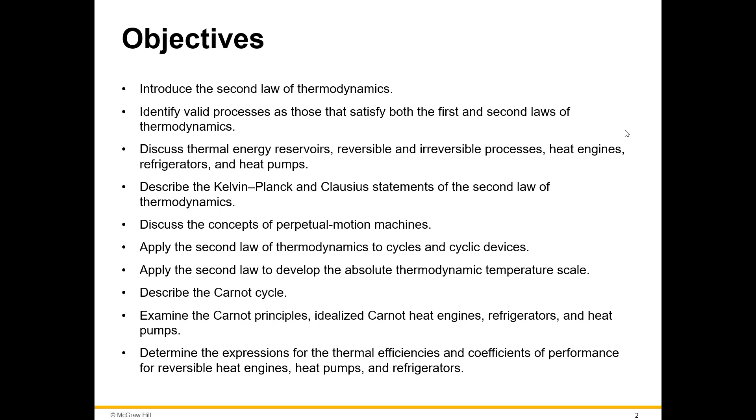Here are the objectives. We're not going to run through each one, but of course we're going to go over what the second law of thermodynamics is and just some things that accompany that.

For the second law of thermodynamics, we talked about it in the first lecture, where the biggest contribution that the second law did was the arrow of time, or some people say the arrow of time. And we often actually use statements to describe the second law of thermodynamics because, in my opinion, it's not as straightforward as the 0th law.

Or the first law. So remember the 0th law, that's basically where we got temperature measuring, right? No matter where you are on Earth, water is going to freeze at 32 degrees. And when you have that third item, you can measure and verify that. And the easiest way to think of that third entity or that third body in the 0th law is a thermometer.

And then the first law, we just spent 5 chapters learning about it. That's energy can never be created nor destroyed. It can only be transferred or changed from one state to another, whether it be potential energy, it can go to kinetic energy, things like that. So now we have the second law.

And so this is that arrow of time. And you've heard me mention the apple example, right? If you have apples, it's going to rot, right? You're never going to witness it go from rotting to unrotting, right? So just like here, a cup of hot coffee does not get hotter in a cooler room, right?

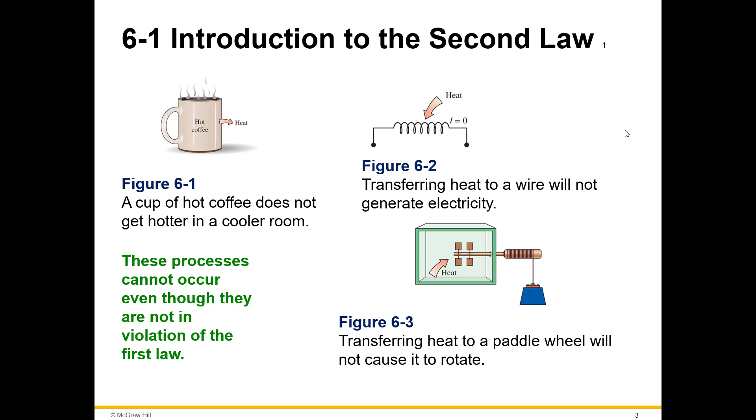They're not violating the first law at all. Energy can never be created nor destroyed. It can only be transferred. Well, we are definitely transferring heat to a paddle wheel, but that's not going to cause it to rotate, right? Transferring heat to a wire will not generate electricity, okay?

This is that arrow, okay? One way. Processes occur in a certain direction and not in the reverse direction. So here are these processes. So within these processes, you have a process that's going through, and you see you have first law, and then second law. And a process must satisfy both the first and second laws of thermodynamics to proceed. And it has to go in one way, right?

So you have to have an energy transfer, right? And then it needs to satisfy that the process occurs in a certain direction and not in the reverse direction.

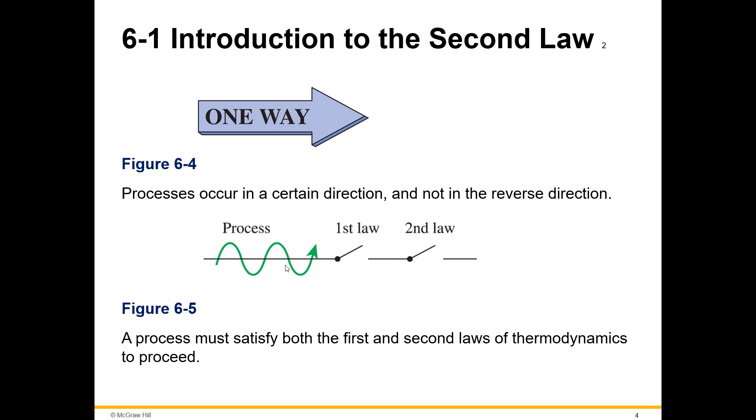So here's the major uses of the second law. A second law may be useful to identify the direction of a process, right? We've talked about that quite a lot. The second law asserts that energy has quality. We talked about that just a little bit, and we talked about it under the curve, right, in the two-phase, what that quality is.

So the second law asserts that energy has quality as well as quantity. So we've measured the amount of energy, but now we're going to talk about the quality of it. The first law is concerned with the quantity of energy and the transformations of energy from one form to another, with no regard to its quality. The second law provides the necessary means to determine the quality, as well as the degree of degradation of the energy during a process. So that's when we can start talking about how that energy is degrading, right, through a process.

The second law of thermodynamics is also used in determining the theoretical limits for the performance of commonly used engineering systems, such as heat engines, refrigerators, as well as predicting the degree of completion of chemical reaction. Right? So if we're talking about calculating the amount of energy, we can definitely do that. We can calculate with no limit. We can calculate to infinity, right? You can calculate as high as you want, or you can calculate chemical reactions in an endless amount.

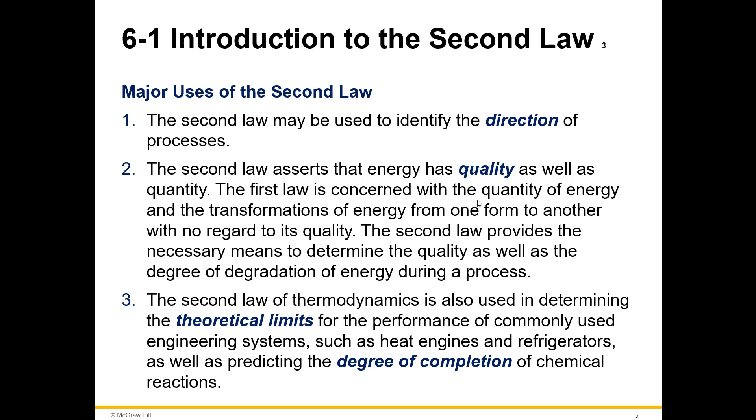A hypothetical body with a relatively large thermal energy capacity, mass times specific heat, that can supply or absorb finite amounts of heat without undergoing any change in temperature is called a thermal energy reservoir, or just a reservoir. So that was a lot in practice, in the real world, where it feels easier to understand.

Large bodies of water, oceans, lakes, rivers, as well as the atmospheric air, can be modeled accurately as thermal energy reservoirs because of their large thermal energy storage capabilities, or thermal masses. So we talked about that a little bit. If you go and take the temperature of a body of water, and you have someone boiling water 10 feet from you or 20 feet from you in the ocean, that ocean is going to be able to absorb that and likely not even change what you're able to measure in that large body of water. Bodies with relatively large thermal masses can be modeled as thermal energy reservoirs because they can hold, accept, absorb that thermal energy.

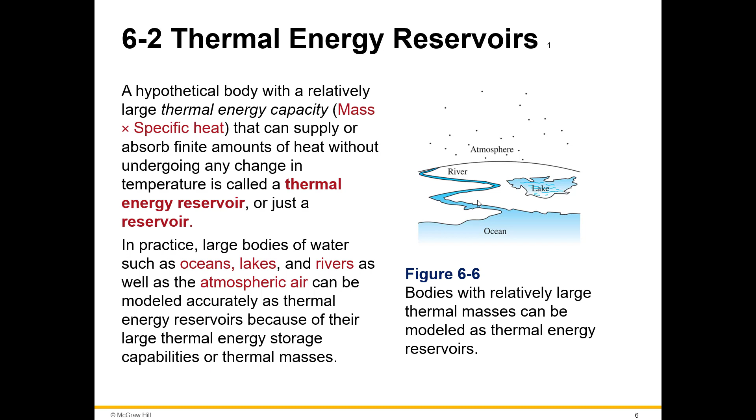A reservoir that supplies energy in the form of heat is called a source. And one that absorbs energy in the form of heat is called a sink. Thermal energy reservoirs are often referred to as heat reservoirs since they supply or absorb energy in the form of heat. So you see that thermal energy source pushing that heat out, and then you see the thermal energy sink receiving that heat in. A source supplies energy in the form of heat, and a sink absorbs it. So you can think of it, if it's easy for you, like a faucet. Thermal energy source is going to provide it, that's the faucet, and then the sink is going to receive that heated water.

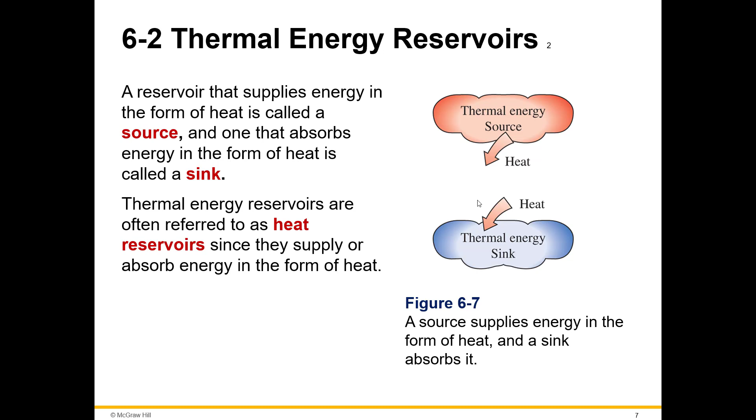Heat engines: a device that converts heat to work. We just talked about that in the first slide here when we said, hey, you can give something all day heat, that doesn't mean that it is going to spin the turbine, or spin the shaft. Well, here you go. You've got a heat engine, a device that converts heat to work.

Because you can give energy. Energy can be transferred through two different means, heat and work. Heat transfer and work, right? It's the two ways we transfer energy. But sometimes we have a lot of heat, like the sun. Sometimes we have a lot of heat, but you know what I need? I need my car to go. I need my tires to spin. I need work being done. I don't need any more heat. I need work. But all of our energy originates from the sun, originates from heat.

So you can look at all of our work being done in non-natural forms. You could make the argument that a waterfall can produce work, things like that. But when you're talking about heat from a sun, from a fire, things like that, you're basically converting it to work.

They receive heat from a high temperature source: solar energy, oil furnace, nuclear reactor. They convert part of this heat to work, usually in the form of a rotating shaft. That's by and large what we use because it's simple, it's long lasting, and it's one of the more efficient ones that we have. They reject the remaining waste heat to a low temperature sink, the atmosphere, rivers, things like that, that can absorb it.

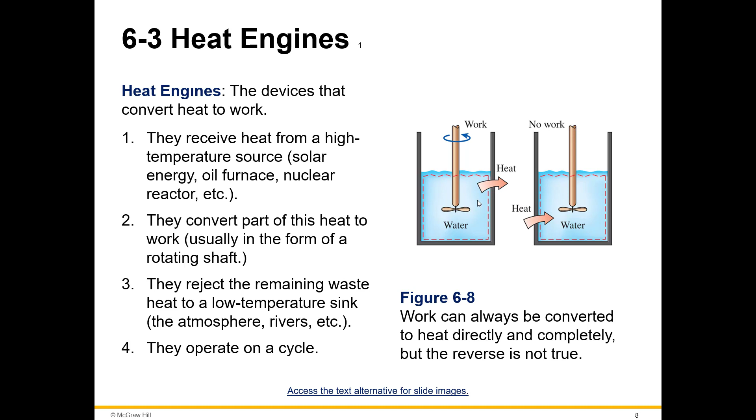So you see work in the water going to heat, and then you see heat going into the water. That doesn't mean you're going to get work, right? They're not interchangeable. They're not exactly the same in reverse, okay?

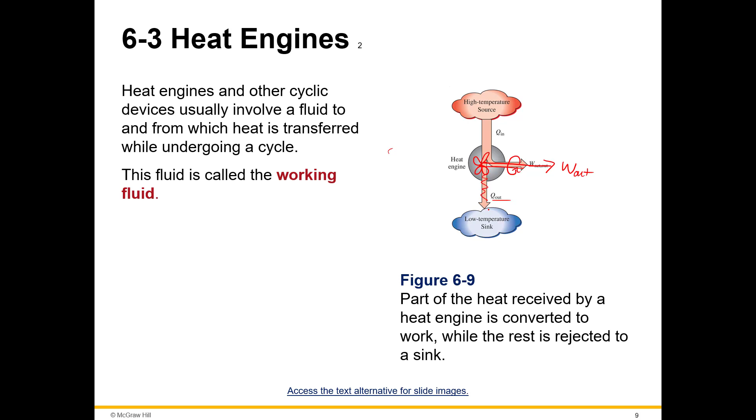And remember, our atmosphere can also serve as a low temperature sink. This is where you get a lot of pollution from before we learned to clean. I mean, it's still happening, but before, by and large, industry knew to clean what you were expelling into these low temperature sinks, into the oceans, things like that.

Q in is the amount of heat supplied to steam in a boiler from a high temperature source, like a furnace, so it's the heat transfer in. And then Q out is the heat transfer out, the amount of heat rejected from steam in a condenser to a low temperature sink, the atmosphere or a river, things like that.

W out is work out, the amount of work delivered by steam as it expands in the turbine, because we need an actual device to convert that heat to work. Work in is the amount of work required to compress water to boiler pressure. So net work is going to equal work out minus work in, in kilojoules. And net work out also equals Q in minus Q out, in kilojoules. It's just the difference between those.

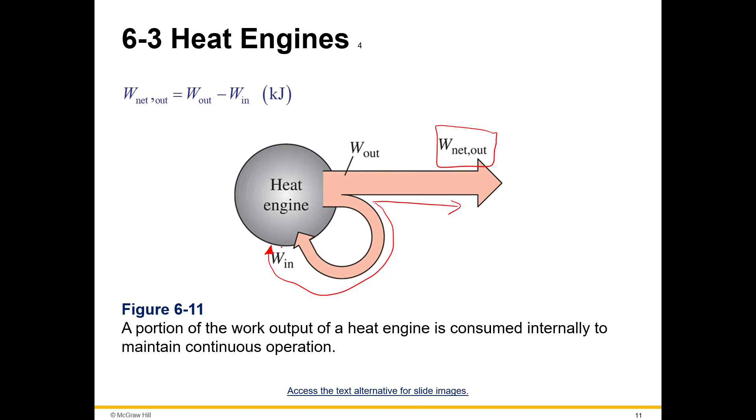So if you're going to expel out some of this work, we're of course going to want to use it. But wouldn't it be great if some of it just went right back around here, and you didn't need another device to come in, you didn't need another turbine here? Because how are we getting this work in? It's got to come from somewhere. Well, maybe we can just take some of the work over here and put it right into this side.

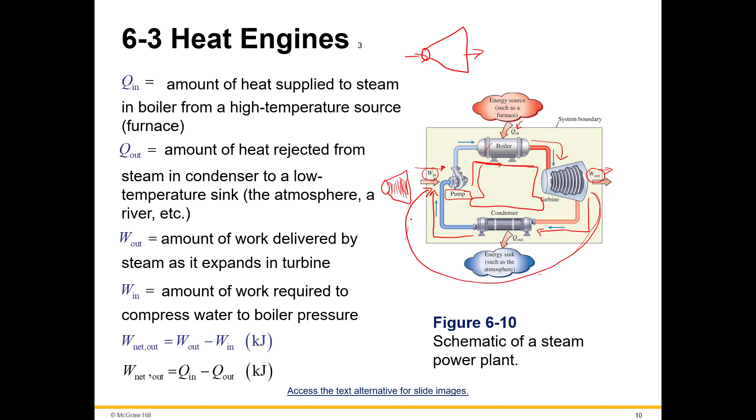That would be great. Thermal efficiency, when we're talking about transferring heat—we want to make it as efficient as possible, because remember, we went over refrigerators and air conditioners. We learned that when we say something's efficient on the grand scheme of 100% efficiency, it's definitely not efficient.

So we have thermal efficiency: the net work output over the total heat input. It's just that ratio. Remember, eta is for efficiency. And TH—that's not efficiency, that's thermal. Remember, I always have at least one student... it's like 7th, 8th, nth. So you have net work out over heat transfer in, and net work out is just the difference between heat transfer in and out, because those, remember, are equal. We learned that in Thermo 1. And then thermal efficiency is 1 less the ratio of Q out and Q in.

The fraction of heat input that is converted to net work output is a measure of the performance of a heat engine and is called thermal efficiency. Of course we're just going to measure the performance—how efficient is it? Some heat engines perform better than others, which means they convert more of the heat they receive into work.

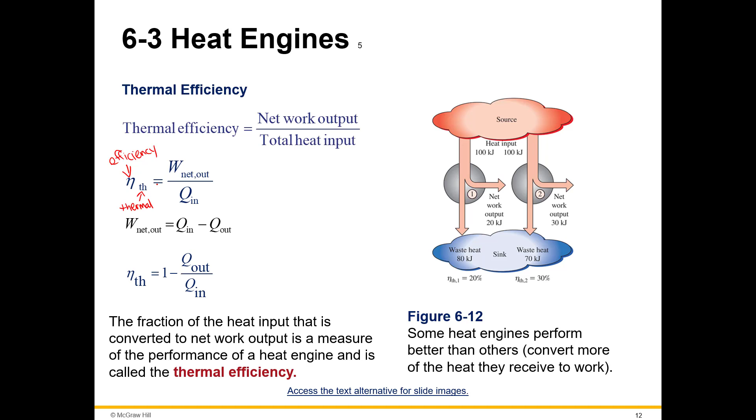QH is the magnitude of heat transfer between a cyclic device and a high temperature medium, so that's TH, high temperature. QH is high heat transfer. QL is the magnitude of heat transfer between a cyclic device and a low temperature medium, TL. So you see here, you've got this high temperature reservoir. If you've got high temperature, you're going to have high heat transfer. And then you're going to have low heat transfer at a low temperature, TL.

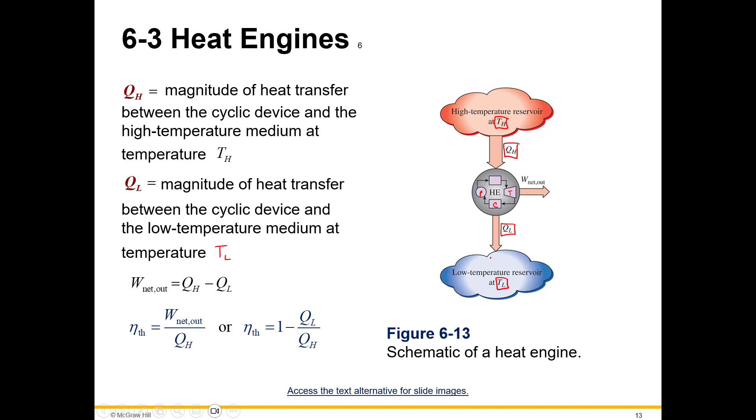And then through here you have a heat engine, and you have this little cycle. You see the pump right here. You've got a turbine here, condenser maybe here, and then you have some net work out, and then you've got the reservoir. And you've got the definitions and equations that we've gone through, and then here's those formulas again, just kind of showing you.

Remember, heat is never created nor destroyed, and it needs to pass the first and second law to be a process. So we have heat transfer coming in at 100, work being produced at 55, so we should have QL of 45, the difference between those two. And just thinking, what about this pump over here? Well, maybe some of this net work out is coming over here, or maybe we have 10 coming around here, and that's added into here, and we're going to have some of it expelled over here.

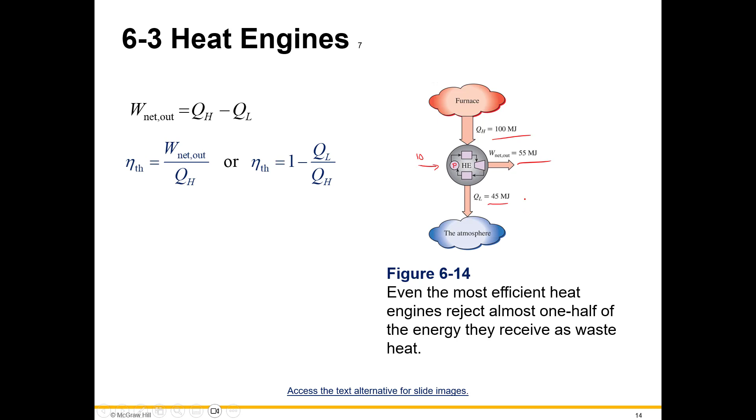In this steam power plant, the condenser is the device where large quantities of waste heat are rejected to rivers, lakes, or the atmosphere. Can we not just take the condenser out of the plant and save all that wasted energy? The answer is, unfortunately, a firm no.

For a simple reason: without a heat rejection process in the condenser, the cycle cannot be completed. Every heat engine must waste some energy by transferring it to a low temperature reservoir in order to complete the cycle, even under idealized conditions. So a couple things I want to talk about here. Idealized means perfect conditions, and we know that perfect is never, ever obtainable.

An example of an idealized condition is an isolated system, not just a closed system, but an isolated system. Or we were operating under idealized conditions all in Thermo 1 because we did not take into account friction, or we didn't really take it into account. We're definitely having some loss there. So under idealized conditions, it's perfect conditions, everything operating at 100% efficiency.

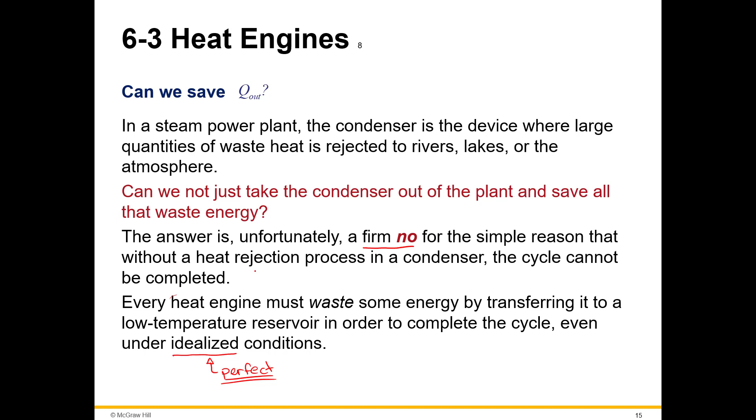So it's a firm no, because I promise you, if there was a way to avoid any heat rejection, we would. We absolutely would, because it's more efficient and it costs less money. So we want to capture everything, but it's a firm no. We definitely cannot. A heat engine cycle cannot be completed without rejecting some heat.

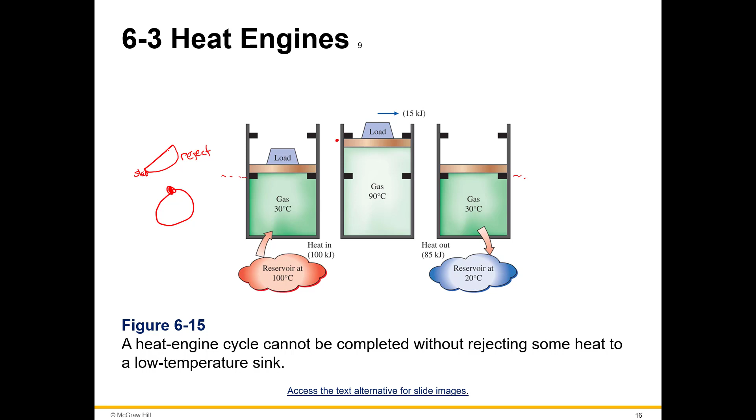The cycle has to start and end at the same place. We can't start and end and then somehow get back to the start. We need a cycle, we need to come back, we need to reject heat. We need to come back to the starting point for a cycle.

Net power production of a heat engine. So here we have some formulas—it's just very easy, 80 minus just the difference, right? And then here's the schematic that we've kind of walked over.

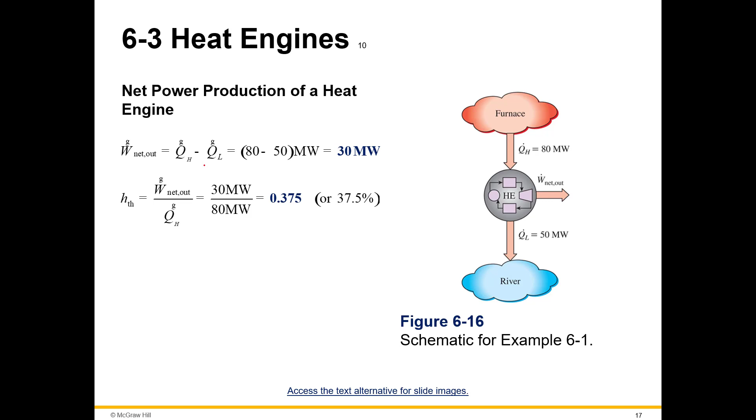Now, I mentioned it before: we actually use a few statements to better describe the second law of thermodynamics.

So let's look at the Kelvin-Planck statement: it is impossible for any device that operates on a cycle to receive heat from a single reservoir and produce a net amount of work. This statement is saying that is possible—heat engines are possible.

No heat engine can have a thermal efficiency of 100%. No heat engine can be 100% efficient. This is saying that we have to expel some. We can't, within a heat engine, take 100% of that thermal energy and have the same amount for net work out. We can't do it. Or, as for a power plant operating, the working fluid must exchange heat with the environment as well as the furnace—we must have some coming out.

The impossibility of having a 100% efficient heat engine is not due to friction or other dissipative effects. It is a limitation that applies to both idealized and actual heat engines. So what it's saying is, on top of the fact that we can't avoid friction, and we're going to have some dissipative effects, on top of idealized regions, we can't have it from an actual heat engine—it's not going to function.

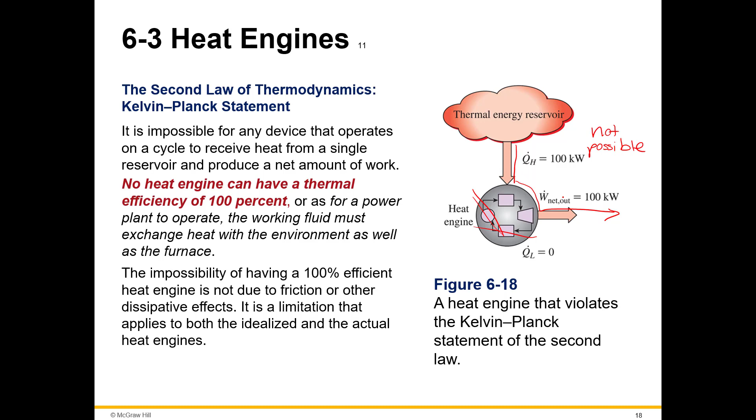The transfer of heat from a low temperature medium to a high temperature one requires special devices called refrigerators. Refrigerators, like heat engines, are cyclic devices—they just operate in reverse. The working fluid used in a refrigeration cycle is called the refrigerant. The most frequently used refrigeration cycle is the vapor compression refrigeration cycle.

We talked about that a little bit—compressing it to get a phase change and a drop in temperature. In a household refrigerator, the freezer compartment is where heat is absorbed by the refrigerant. Remember I said, don't think of it as blasting cold air in—think of it as heat absorbed, because the second law says heat flows from hot to cold, not the other way around. The other way around, cold to hot, violates the second law. We have an arrow of direction right here: hot to cold.

Heat is absorbed by the refrigerant in what serves as the evaporator, and the coils—usually behind the refrigerator—where the heat is dissipated to the kitchen air serve as the condenser.

And so you'll see here, you follow the flow of energy: we have Q-L-N, a low heat transfer—not cool air, but a low heat transfer—going into that evaporator. We come around, and we have some net work into this compressor, because we need to make this non-natural phenomenon work; we need to put some work in there. Then that's going to come up, and it's going to be hot. We absorb that heat and expel it out the back of the refrigerator. Then we come around to an expansion valve.

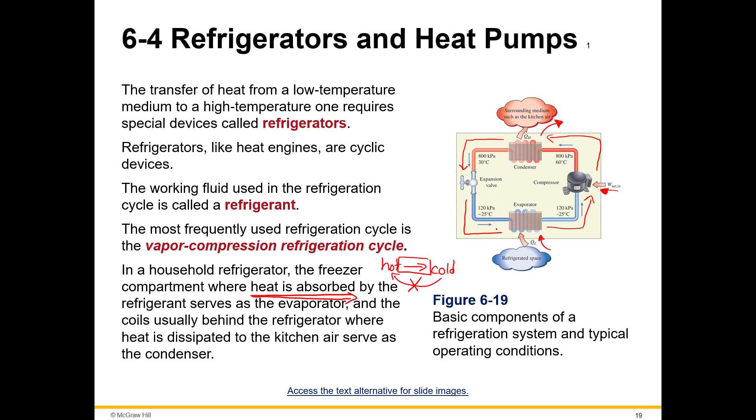We're going to cause a drop in temperature. We're going to come back around into the refrigeration space and see the evaporator.

Coefficient of performance. The efficiency of a refrigerator is expressed in terms of COP, coefficient of performance. That's where we find how efficient the refrigerator is. So you see we have those formulas here, and you can see the same heat engine schematic, just in reverse, because this is the refrigeration one.

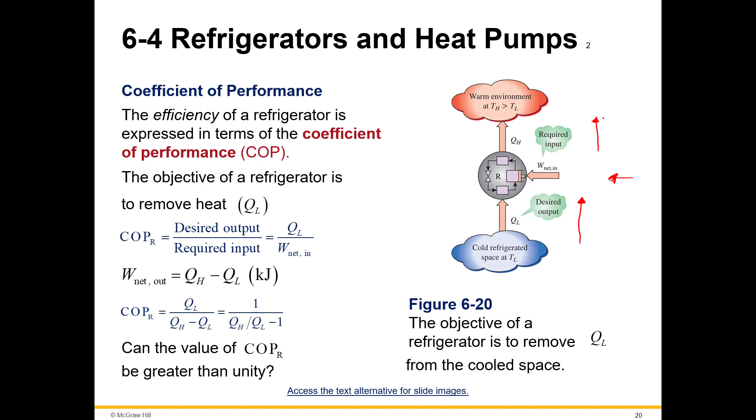So you have QL, a low heat transfer. I'm not going to say cold, I'm going to say low heat transfer, because remember, we do not want to violate the first law. We have some net work coming in, and then we have QL being expelled, QH being expelled. Okay, we have heat pumps, which have coefficient of performance formulas here.

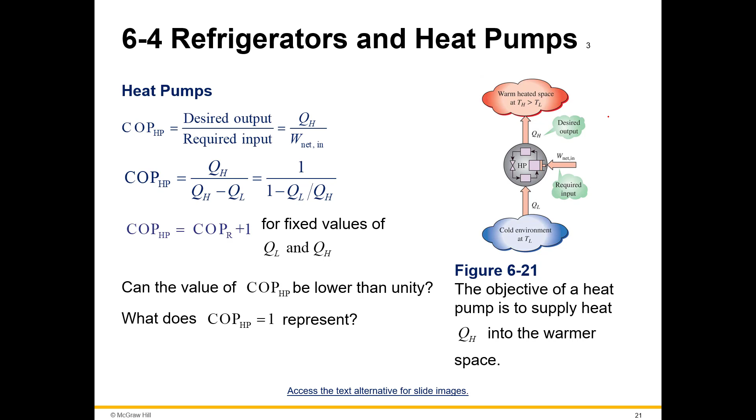We kind of already talked about those. All right, and then refrigeration and heat pumps. So this is cold outdoor air, all outdoors, and then warm indoors.

And so we have right here, we have some work coming in, and QH coming in. We are heating this house, right? So we have right here, a low temperature coming in. We're going to go into this. Around here, we have some net work coming in, and we're going to expel that hot discharge into our indoors. We're going to heat this house.

Isn't that amazing? Your air conditioner works theoretically, right? I'm not going to say exactly, because you don't have a refrigerator hooked up outside, right? But theoretically, it's basically the same as your heater. We're just using the expelling to heat indoors. So, of course, there's multiple different types of heaters, but just from a schematic perspective.

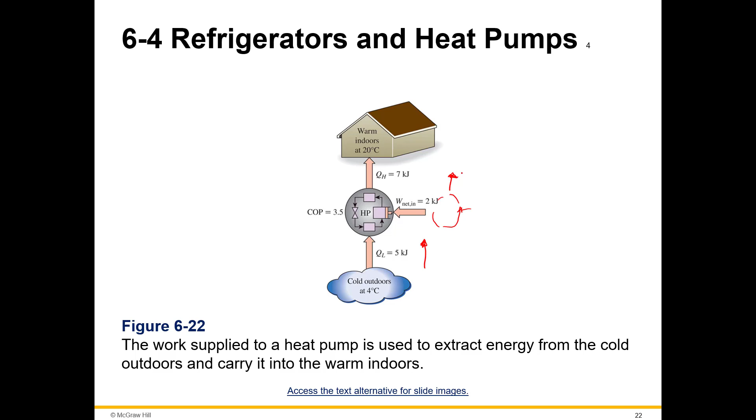The work supplied to a heat pump is used to extract energy from the cold outdoors and carry it into the warm indoors. This describes the performance of refrigerators, air conditioners, and heat pumps.

Most heat pumps in operation have a seasonally average coefficient of 2 to 3. Most existing heat pumps use the cold air outside as a heat source in winter. And then in cold climates, their efficiency drops considerably when temperatures are below the freezing point.

That's just because it's harder to work. It's harder to get that into the working fluid because it's colder. You need more work in to convert it, to bring it up. In such cases, geothermal ground source, which uses the ground as the heat source, can be used.

And this is because in really, really cold environments, say you were in a cave — I did a cave tour a couple months ago — it was very, very cold outside. But when you went underground, it was relatively warm. And it's because the temperature is much more stable underground.

It's much more consistent. So if it's really, really cold outside, the ground is going to be warmer. Or if it's really, really hot outside, the ground is going to be colder, because it's keeping that — I won't say completely, but much more close to equilibrium temperature than what we experience just in our natural atmosphere. Such heat pumps are more expensive to install, but they are also more efficient. It's because it's more stable. That's one reason why it's more stable, right?

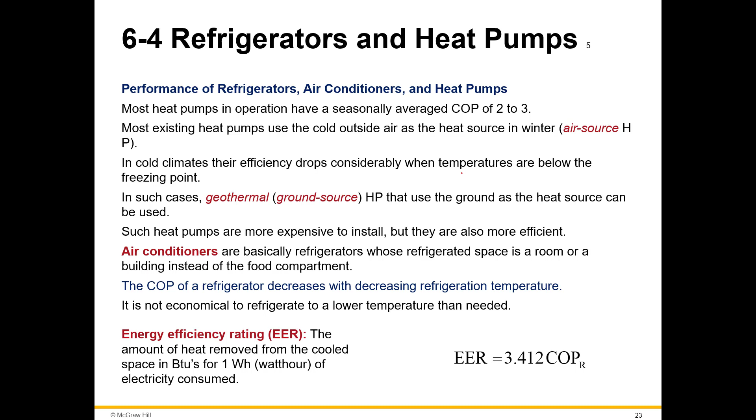Energy efficiency rating: the amount of heat removed from the cooled space in BTUs for 1 watt-hour of electricity consumed.

So let's move to the second law of thermodynamics, the Clausius statement. So we have the Kelvin-Planck statement — we can't violate that. And now let's look at the other statement. These two statements are the ones that describe the second law.

It is impossible to construct a device that operates in a cycle and produces no effect other than the transfer of heat from a lower temperature body to a higher temperature body. It states that a refrigerator cannot operate unless its compressor is driven by an external power source, such as an electrical motor. You know what that means?

That's what it means. The net effect on the surroundings involves the consumption of some energy in the form of work, in addition to the transfer of heat from a colder body to a warmer one. So I need both work to come in and do the thing that is not naturally going to happen, which means something going from a lower temperature to a higher temperature on its own.

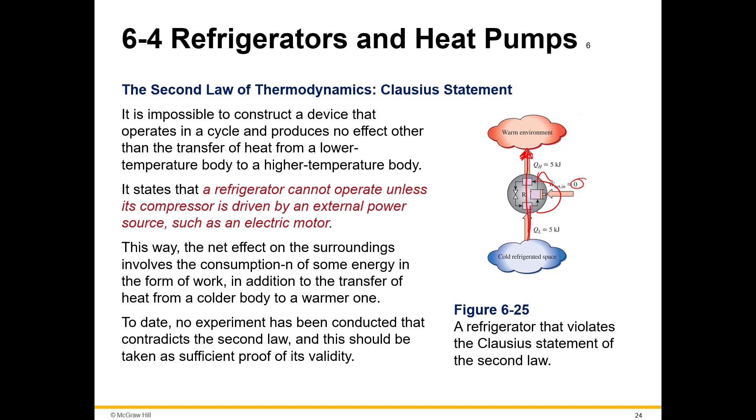This is a refrigerator that violates the Clausius statement, because this is not going to happen. I can't have no work and go all the way over here. If so, why wouldn't I just go here? I can't go from cold to warm. I need something else to come in and do it.

So here's the equivalency of the two statements. This is proof that the violation of the Kelvin-Planck statement leads to the violation of the Clausius statement. You see how they are related but not exactly the same? The Kelvin-Planck and Clausius statements are equivalent in their consequences, and either can be used as the expression of the second law of thermodynamics.

So this is how we express the second law of thermodynamics: the Kelvin-Planck and the Clausius statement. Any device that violates the Kelvin-Planck statement also violates the Clausius statement, and vice versa. So if you violate one, you violate both. And here they are.

So if you have QL coming into a refrigerator, and you have this heat engine, you have QH plus QL from the high temperature reservoir going in, QH into the heat engine, and now you've entered the cycle. You need that work coming in. You need this work, and it's both missing if you violate it. So if you violate one, you violate both.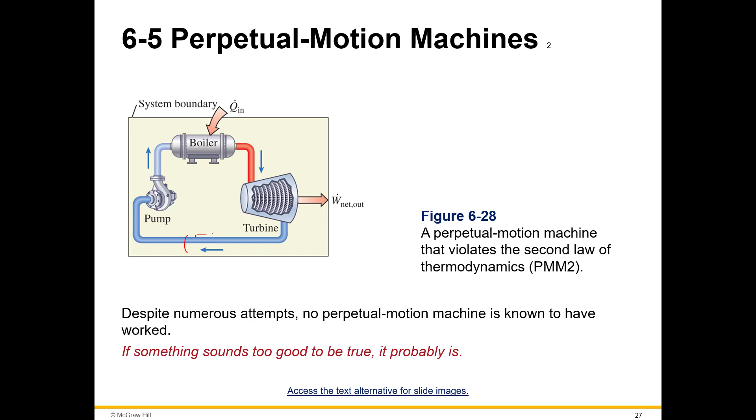And this one violates the second law, PMM2. You see here it's missing that condenser. There it is — we need something to expel out as well. So we have that Q out.

Reversible processes: a process that can be reversed without leaving any trace on its surroundings. An irreversible process is one that is not reversible. Think of it as a rubber band — if you stretch it and it goes to this stretched state, and then it comes back, it's just back to that original rubber band. This is reversible.

Irreversible: take this plank, this toothpick, and then you bend it. This toothpick is bent like that. And then you let go of it, and it's going to stay just like this. This is state 1, state 2, and then state 3. This is a reversible process. This, state 1, state 2, and then state 3, is irreversible. All the processes occurring in nature are irreversible.

Why are we interested in reversible processes? Because they are easy to analyze, and they serve as idealized models, theoretical limits, to which actual processes can be compared. This is really important to know.

So when we talk about reversible processes, think of it from a common sense standpoint. Even though we have this rubber band, and we've stretched it and it came back, is it 100% the exact same as state 1? Is state 1 and state 3 the exact same in the real world? Of course not. It's going to have some little fissure, some loss of elasticity. Maybe we don't even have the tool to calculate the additional length that we got from stretching it. We know in our brain that it's not 100% completely reversible. But we use these types of scenarios to analyze them so that we can get limits.

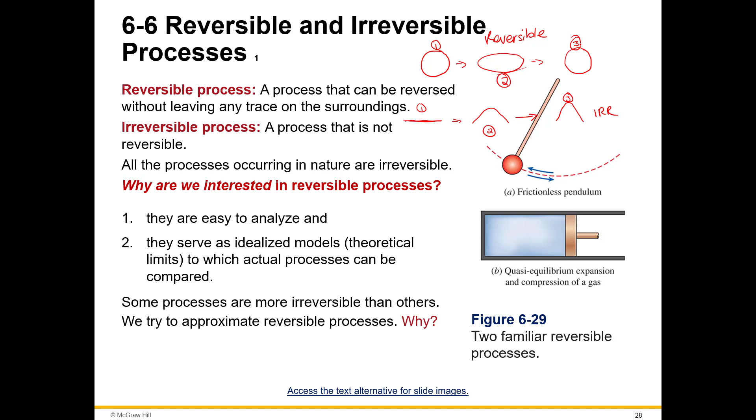Some processes are more irreversible than others. We try to approximate reversible processes. Why? So that we can compare them, so that we can see how efficient our item is, or our process, whatever we're doing. Reversible processes deliver the most and consume the least amount of work. Why? Because it's under idealized conditions. We're going to be extracting the most, and we're going to be using the least amount of work.

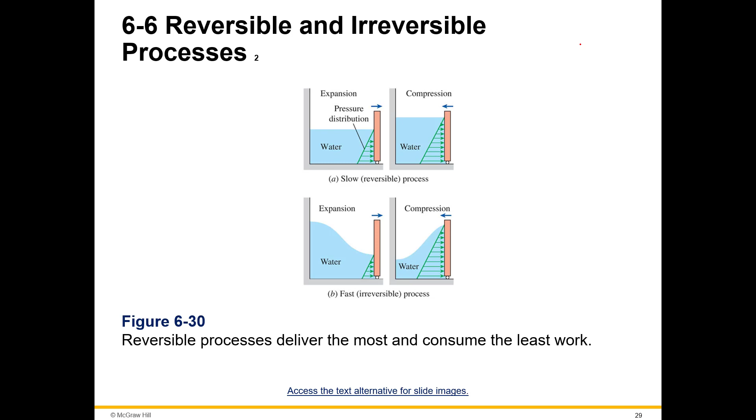Irreversibilities are the factors that cause a process to be irreversible. They include friction, unrestrained expansion, mixing of two fluids, heat transfer across a finite temperature difference, electric resistance, inelastic deformation of solids, chemical reactions, and more. The presence of any of these effects renders a process irreversible.

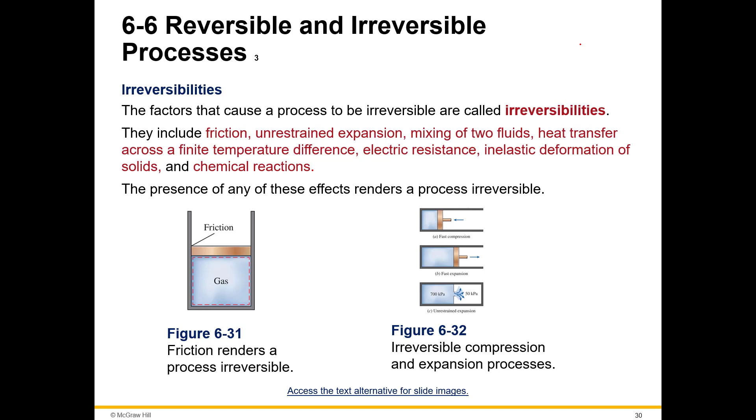So we know that actually everything is irreversible. But we do use things and assume they are reversible so that we can use them as measuring points, even as goals you can think of it, trying to achieve reversible levels. You know that you never will, but that's the best that you could ever get. So that's what you strive for.

Heat transfer through a temperature difference is called irreversible, and the reverse process is impossible. So heat transfer through a temperature difference is irreversible. You can't undo it, and also you can't reverse it. We go from hot to cold, and so we can't go backwards and we can't undo it.

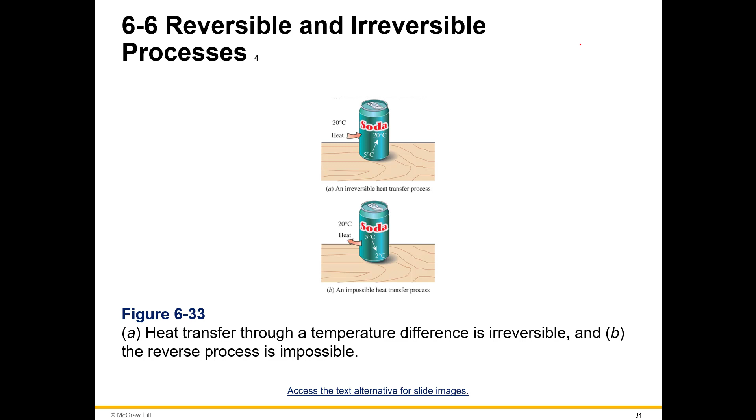Internally and externally reversible processes: an internally reversible process is one where no irreversibilities occur within the boundaries of the system during a process. Externally reversible is if no irreversibilities occur outside the system boundaries. A totally reversible process involves no irreversibilities within the system or its surroundings.

A totally reversible process involves no heat transfer through a finite temperature difference, no non-quasi-equilibrium changes, and no friction or other dissipative effects, which we know exist. So we know that this is not physically possible, but we will calculate on it.

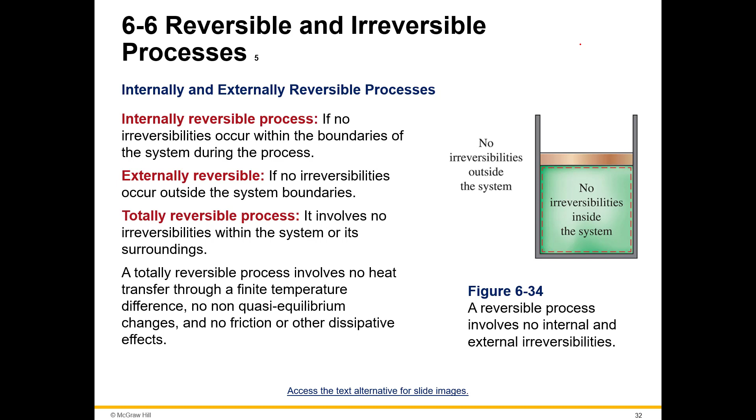So here we have reversible isothermal expansion. We have QH going in, so we're going to have some expansion. And then we have reversible adiabatic expansion, so that's going to be here.

Okay, and reversible isothermal compression. So we're compressing. And then we have reversible adiabatic compression. Just showing you on a schematic.

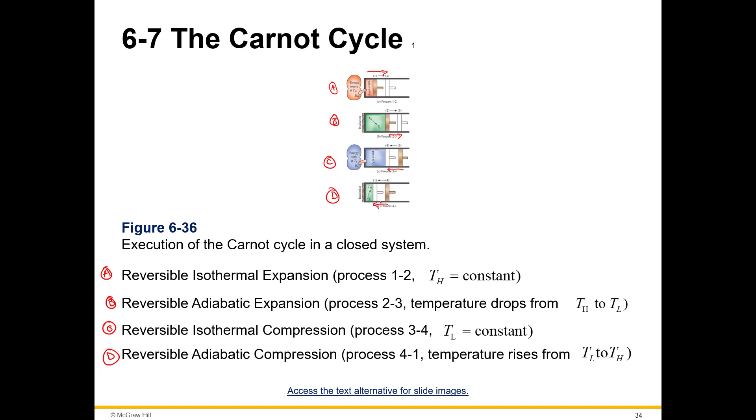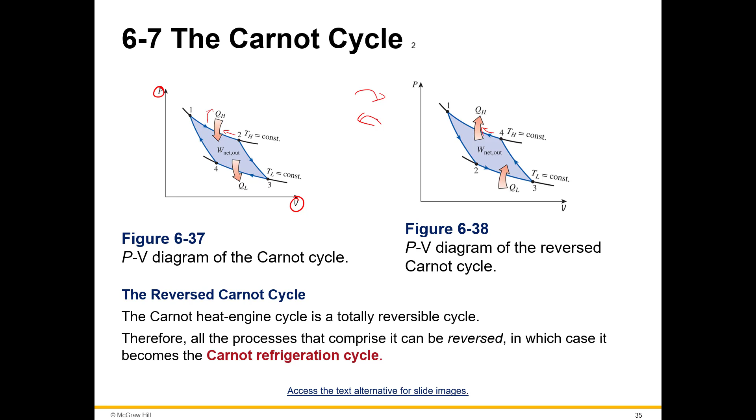The Carnot heat engine cycle is totally reversible. It is a totally reversible cycle. Therefore, all the processes that comprise it can be reversed, in which case it becomes the Carnot refrigeration cycle.

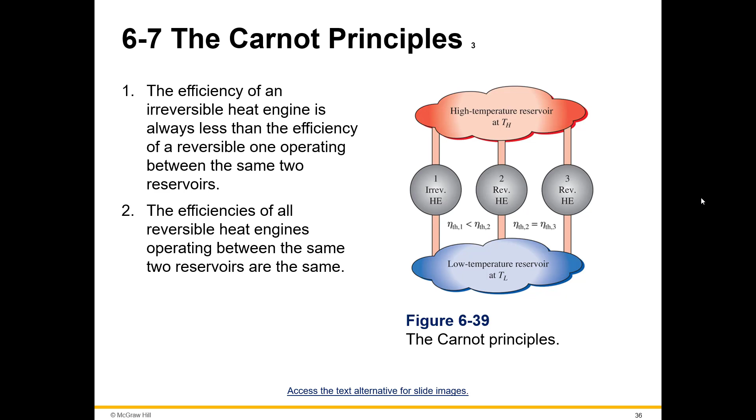The efficiency of an irreversible heat engine is always less than the efficiency of a reversible one operating between the two reservoirs. That makes sense, because if it's reversible, then we know it is operating under idealized conditions. So of course, the efficiency of that is going to be higher, because theoretically it should be perfect efficiency. So the efficiency of an irreversible heat engine is always going to be less. The efficiency of all reversible heat engines operating between the same two reservoirs, so operating under the same conditions, are the same, because if you have the same conditions, and within those two conditions they are perfect or reversible or idealized, then the efficiency is going to be perfect and thus the same.

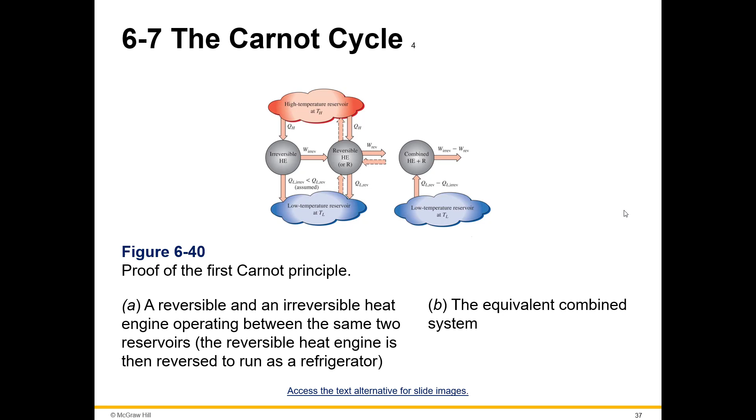Proof of the first Carnot principle. So here we have A, and remember we can't violate the first or second law of thermo. A reversible and an irreversible heat engine operating between the same two reservoirs. The reversible heat engine is then reversed to run as a refrigerator. Okay, and then B, so that's able to be done, correct? And then B, the equivalent combined system. So all this is saying is that it doesn't violate the first and second law. It's just letting you know that the Carnot cycle does not violate any sort of law.

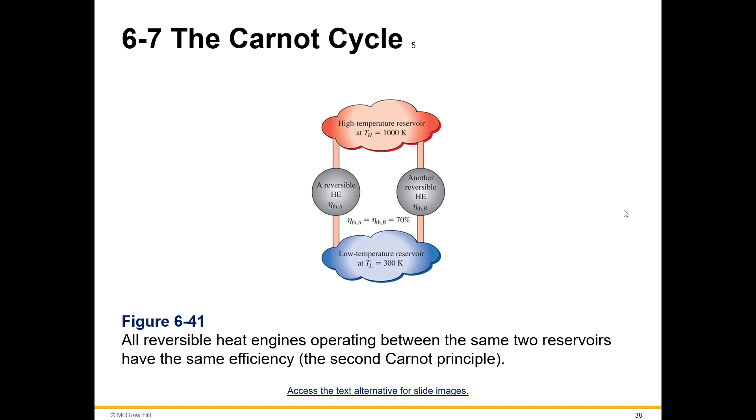All reversible heat engines operating between the same two reservoirs have the same efficiency, which is the second Carnot principle, which means that when you have the same conditions and they are reversible, then they're going to have the same efficiency.

A temperature scale that is independent of the properties of the substances used to measure temperature is called a thermodynamic temperature scale. Such a temperature scale offers great conveniences in thermodynamic calculations, because as you can see and as you have seen, temperature is one of the main things we work with, especially with PVT because of the relationship.

Here's the schematic, the arrangement of the heat engines used to develop the thermodynamic temperature scale. This just kind of goes through what those are. And then you can kind of see T2 where it takes certain temperatures. So you have T1, which is the thermal energy reservoir, and T2 is about midway through, and T3 down there is the thermal energy reservoir at the bottom.

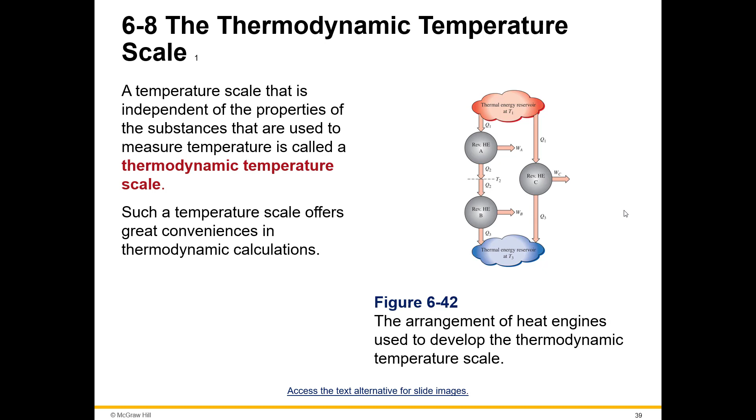This temperature scale is called the Kelvin scale, and the temperature on this scale is called absolute temperatures.

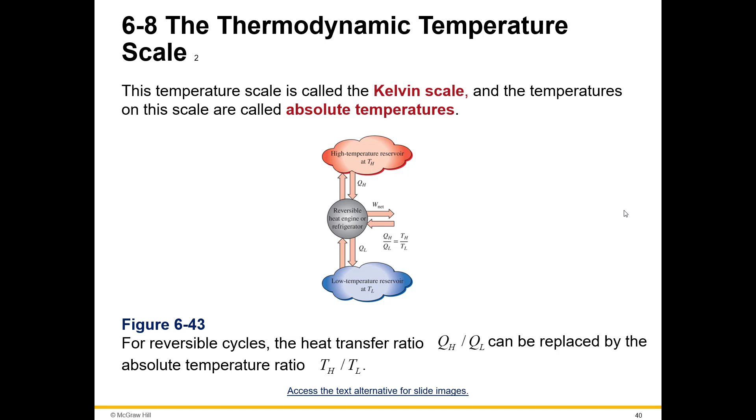And for reversible cycles, the heat transfer ratio, which is QH over QL, can be replaced by the absolute temperature ratio, TH and TL. A conceptual experimental setup to determine thermodynamic temperatures on the Kelvin scale by measuring heat transfers QH and QL. So first of all, T in Celsius equals T Kelvin minus 273.15. Of course, that's the conversion. But then this is just showing you that QH, again, with these boxes, like what is happening?

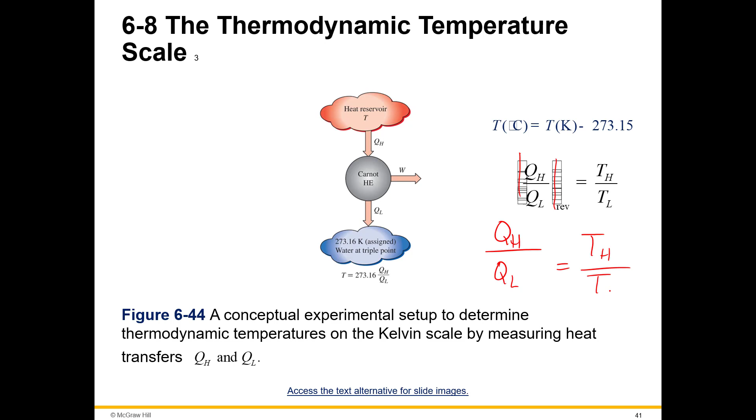QH over QL, and this is equal to TH over TL. And this is in regard to reversible heat engines.

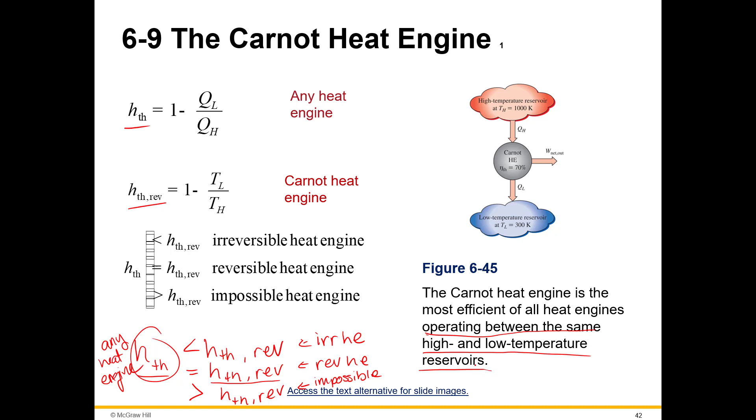So we always make that little plug in there to let you know that, hey, these are tested under the same conditions so that we understand what is able to be operated between the two.

No heat engine can have a higher efficiency than a reversible heat engine operating between the same high and low temperatures. We've talked about that, right? So you cannot have a higher efficiency than a reversible heat engine. The Carnot heat engine is the reversible heat engine. Therefore, you cannot have a higher efficiency than the Carnot heat engine.

So therefore, if your heat engine is equal to a Carnot heat engine, then you are having a reversible heat engine with the highest efficiency. If your heat engine is less than the Carnot heat engine, well then you're having a real world, an irreversible heat engine, right? One that we encounter all the time.

And if what you're calculating with your heat engine is a higher efficiency than a Carnot heat engine, well then you know that's impossible and that's not realistic, because you can't have something better than perfect. You can't have more perfect. It's either perfect or not. To say something is more perfect is not even a correct thing.

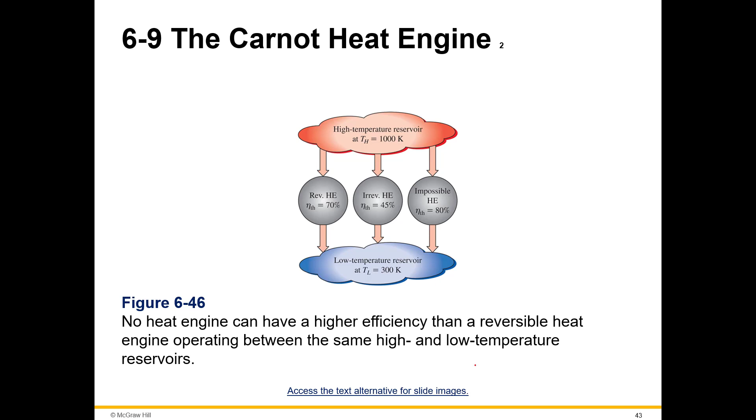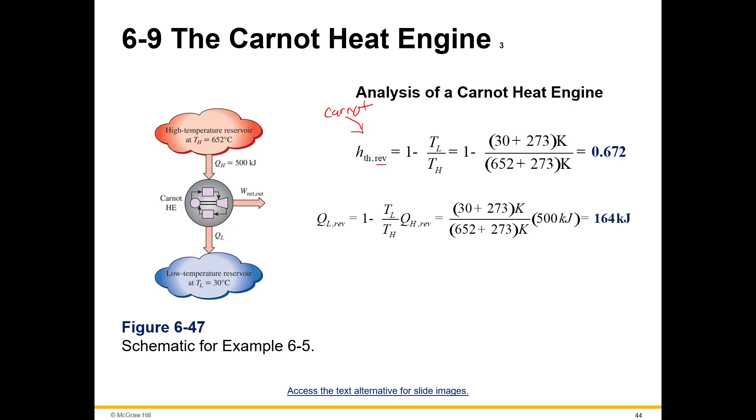So that's where this comes into play. This is the peak. This is the limit for heat engines. This is just an analysis of the heat engine. Just make sure that you're remembering, right? So this is thermal heat engine, and then when you see reversible, we're talking about Carnot. Remember that denotation right there, okay? And so this is just plugging in some details there.

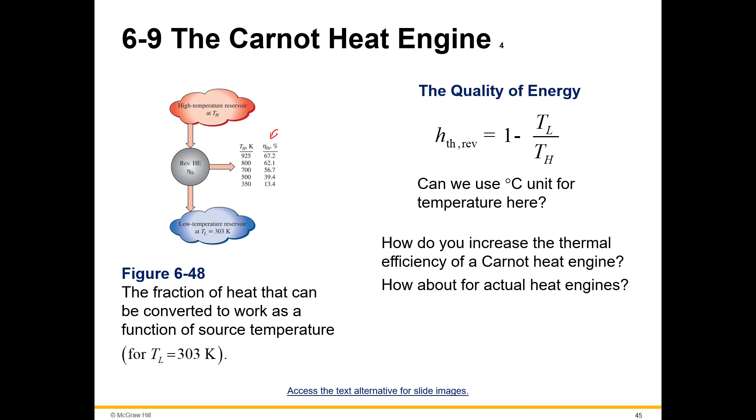And then when we start talking about the quality, the efficiency is denoted as a percentage. The fraction of heat that can be converted to work as a function of the source temperature, because we want to look at the efficiency of it. How efficient can we be? How much heat can be converted to work? How much are we able to convert, 50% of it? How efficient are we able to do it? What is the quality of this, right?

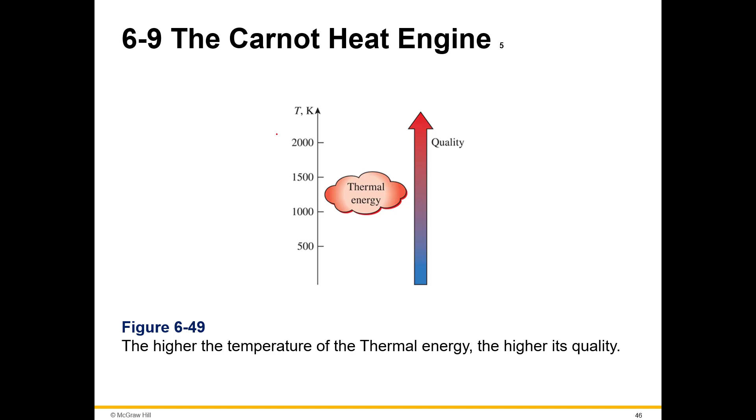The higher the temperature of the thermal energy, the higher its quality. Okay, so that just makes sense because that's how energy is transferred through heat and work. So there's more to use, more to be garnered, more to grasp, more to achieve. So the higher the temperature, the higher the available energy, the higher its quality.

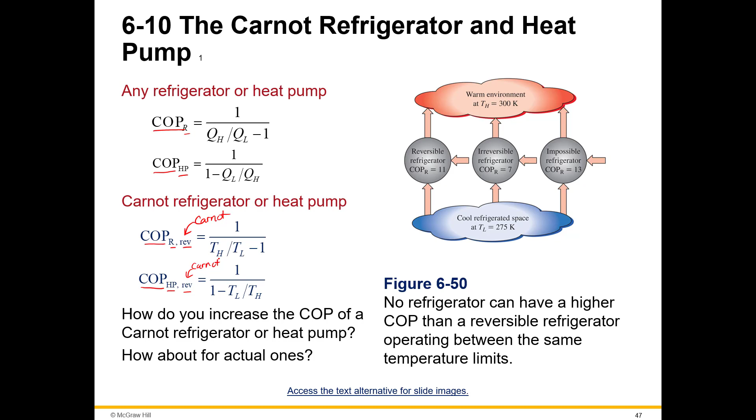No refrigerator can have a higher coefficient of performance than a reversible refrigerator operating between the same temperature limits. Why? Because nothing is going to get better than perfect. Reversible systems, whether a refrigerator or a heat pump, are under idealized, perfect conditions. It's never going to operate better than perfect. It is the peak, your upper limit.

So here's the coefficient of performance of a refrigerator. If your coefficient of performance of a refrigerator is less than that of the Carnot, reversible refrigerator, then that is an irreversible refrigerator. This is what we've got. This is what's in your house.

Oh, there's an error on this page. Let's see it right here. I'm sure I was going to get emails for that.

Rightfully so. Okay, so if you have a coefficient of performance for a refrigerator, and it is equal to the coefficient of performance of a refrigerator for a reversible system, a Carnot system, if those are equal, then you have a reversible refrigerator. Because you can't be better than the very best. So if a Carnot is reversible, and that is what yours is equaling, then it is also, by proxy, reversible.

And then, of course, if the coefficient of performance of a refrigerator is greater than that of the same, but a Carnot, then that's an impossible refrigerator. So we can't have this. Not able to be done.

Okay, so just a note here: the coefficient of performance of a reversible refrigerator or heat pump is the maximum theoretical value. We've talked about that for the specified temperature limits. And then actual refrigerators or heat pumps may approach these values as their designs are improved, but they can never reach them, because we can never get something in perfect conditions.

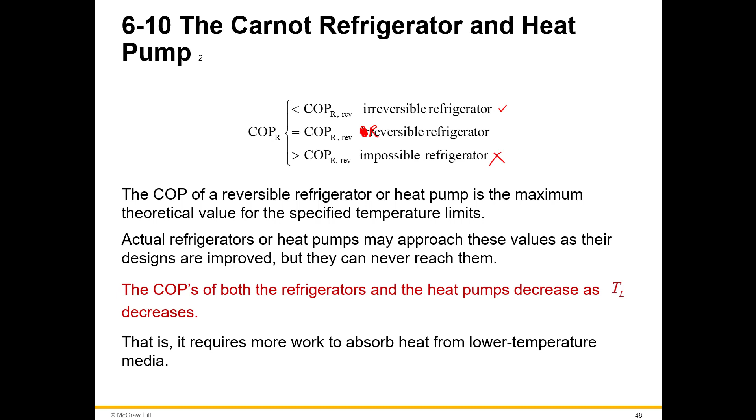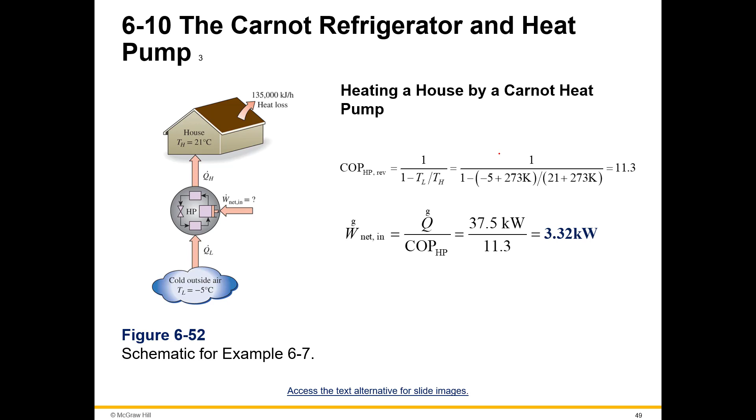It requires more work to absorb heat from a lower temperature because it's less to get, it's less readily available. Okay, and then here's some just the Carnot refrigerator and the heat pump in regard to refrigerators, heating your house, things like that, and the formulas here. And there's one worked for the net work.

Okay, so just in summary, we talked about the second law, we talked about the arrow of time, the Kelvin Planck, and the Clausius' two statements. We talked about thermal energy reservoirs and how they relate to the atmosphere, water, things like that. We talked about heat engines in great detail. Now, we can't have a heat engine that expels all of its work, that's a violation of the second law.

Refrigerators and heat pumps, we talked about those and how they're essentially just opposite directions. Perpetual motion machines, we talked about PMMs and how some may violate the first or second law. And we talked about reversible and irreversible processes where we're going to be calculating them. Reversible is the maximum efficiency, it's 100% perfect. And then irreversible is what we actually have. The ratio of those compared together is our efficiency.

We talked about the Carnot cycle and how we use those to measure our irreversible processes too, and the principles that go along with that. We talked about the thermodynamic temperature scale, Kelvin, and how we use those to measure. And we talked about the Carnot heat engine as well as the Carnot refrigerator and heat pump. So we talked about all of those and how we use them, greater than, equal to, less than. We talked about all of these.